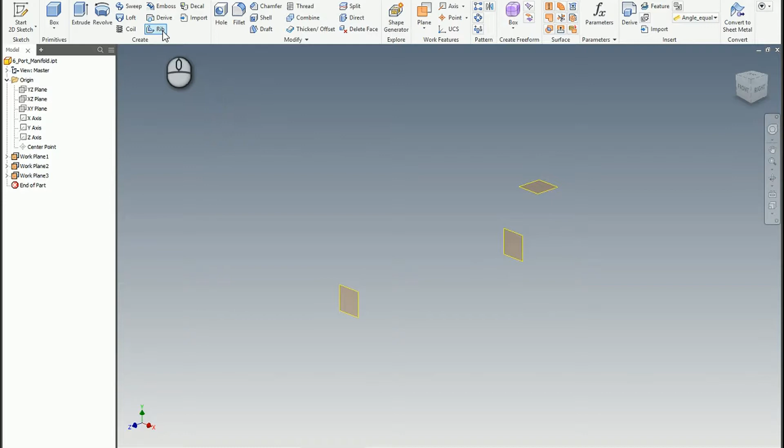So to bring in the external barbs, because I don't know the barb design and don't want to look it up, I can extract it really quickly from an existing design. I'm going to go ahead and derive in those solids that I modified. The 60 should be that 3/4 barb. I'm going to grab that one first and hit open, and it places it in position.

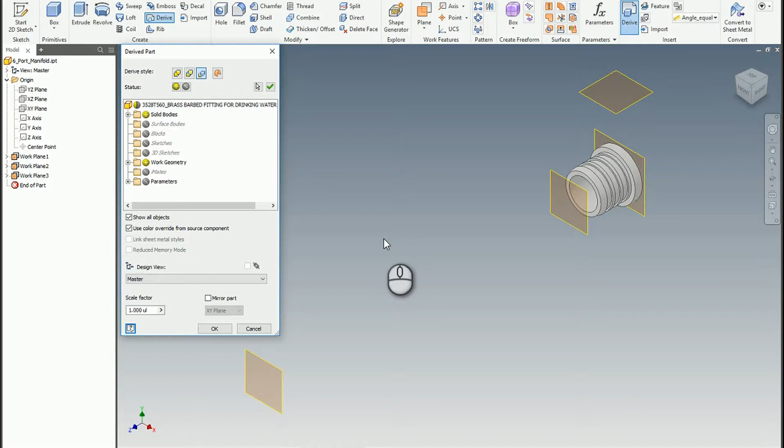Now, what the derive tool does is it allows me to grab geometry from outside my model and bring it into this model, then I can pick and choose which features come across. I can also change colors, change the scale, mirror it. In this case, I'm going to keep it really simple and just turn off the work geometry. I don't need it, I only require the barb solid. So then I hit OK, and now we've brought that barb in.

And the really powerful part of the derive tool is if this barb had to change for whatever reason, like I had to modify it, it would update in this part. So this is another great technique for using sort of a quote unquote live link to the original models. Something pretty powerful about that.

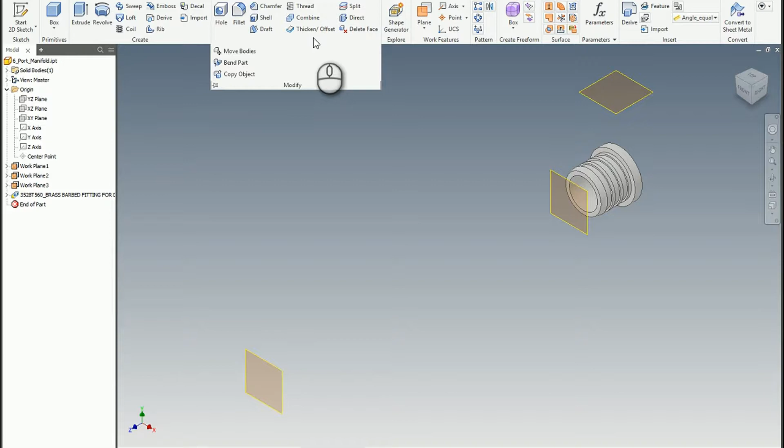Awesome. So what we'll do next then is we will grab the barb here, and let's position it at the end. We'll just move this one right away before we bring in the other one.

So I'm going to go ahead and grab the move bodies command. What this does is it allows me to take a solid body and reposition it. Regardless of where you originally sketched it, or in this case where I originally imported it, I can reposition it using this move bodies tool. So it's a pretty powerful tool. It's a little bit quirky, like every time you launch it, it wants to move it in the X 1 inch right away. That's a little strange, but it's still pretty solid.

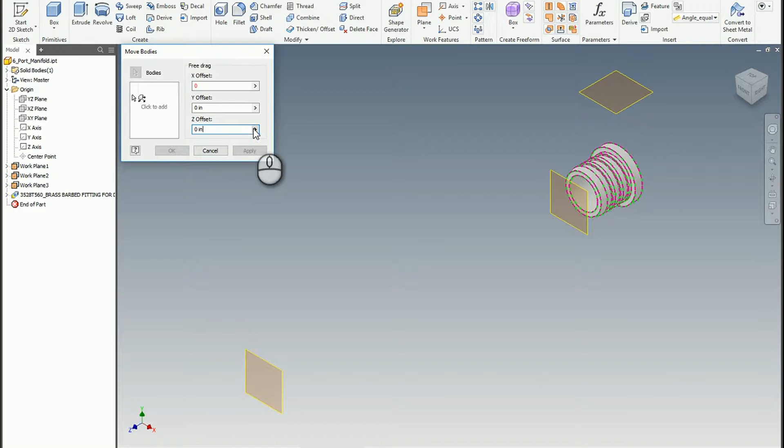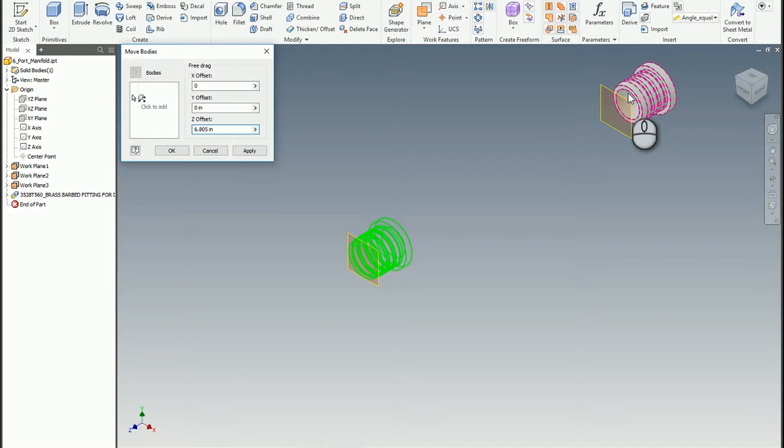And so that's it for this one. All we're going to do is stick the front of that all the way to the very end of the part. And now we've repositioned that 3/4 barb.

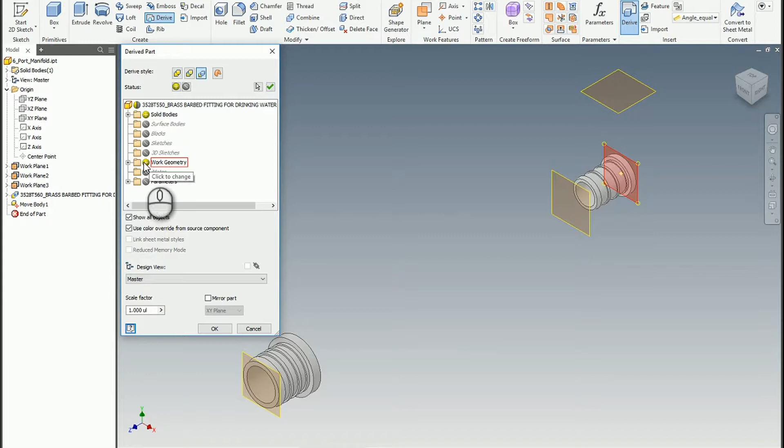Cool. So the next step in the process then is we need to apply the second barb. So if we come in here and derive in the 3/4 inch barb, we can do a lot of the same stuff. So I hit open. I don't believe I need any work geometry, so I'm just going to turn that off. And then I open it up, and there's our 3/4 barb.

We're going to have to reposition this as well, which is where we have these additional work planes to utilize. So let's launch the Move Bodies tool one more time. I'm going to grab the 3/4 inch barb this time, and I don't want to offset it in the X. Instead of translating, what we actually want to do is rotate it about a line.

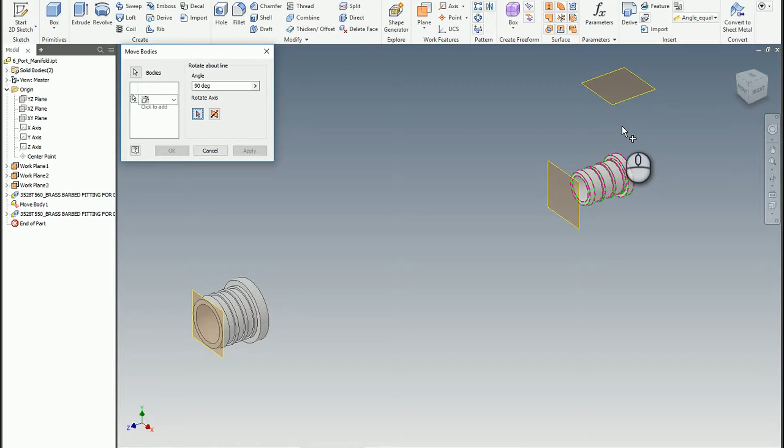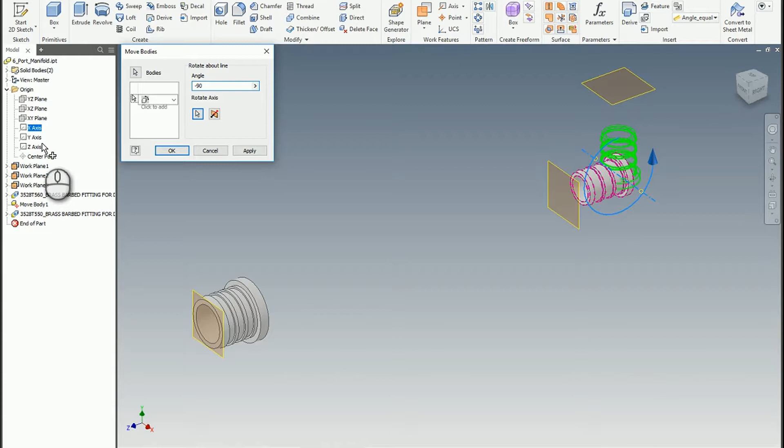If you remember from the McMaster-Carr website, that barb is actually facing directly up, opening to the positive Y in this case. So I want to rotate that about the X axis, which would flip it up or down to the right orientation. You can set this to -90, or say 270 — it doesn't really matter what you type in as long as you get the orientation correct. Then I'll go ahead and hit apply.

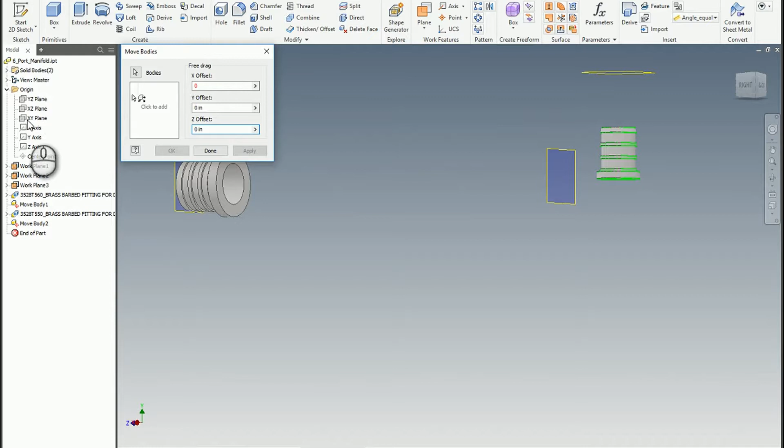Now I can do the rest of the motions to reposition this. I'm going to do a free rotate or translate again, not in the X, and then measure in the Z, this time from the XY plane. It's not visible, so let me turn that on here quick, just for our reference.

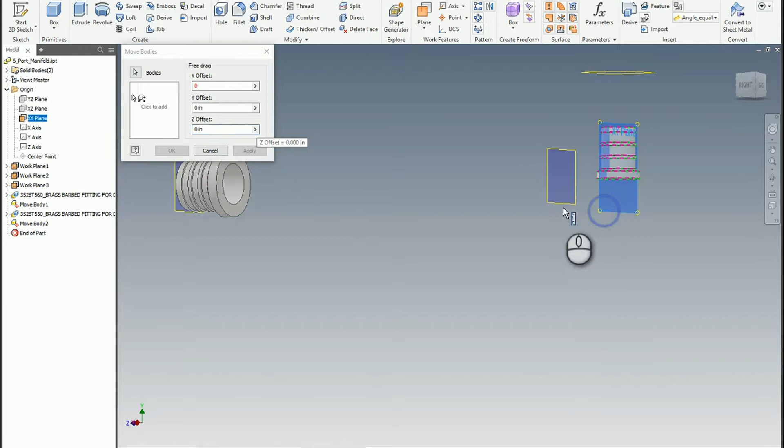Now we'll launch the Move Bodies command again. This body, I don't want to move it in the X — we'll move it along the Z instead. Select it, do the measure, and measure from plane to plane to move it in the Z. We like that, so hit apply. Select it again — still don't want to move it in the X. Now we're going to offset this in the Y direction, so I'll select, measure, and measure from the top to the very top of the part. Then go ahead and hit OK.

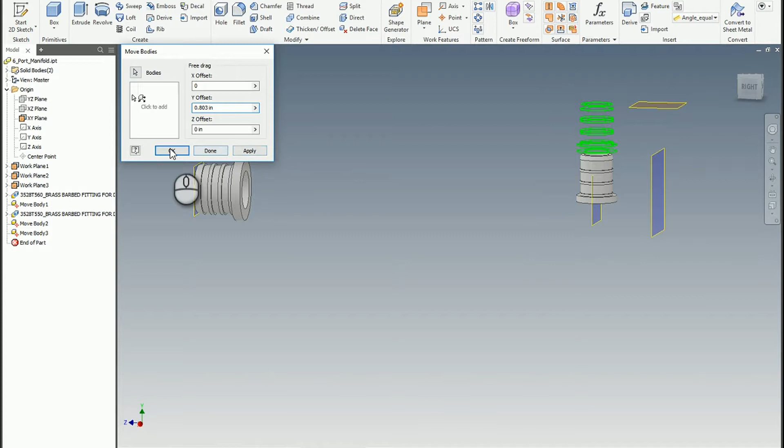So now we should have these components positioned exactly the way we need them to be. What I'm going to do is create the body of the part, and then we're going to add additional features to the component to kind of finish off the design.

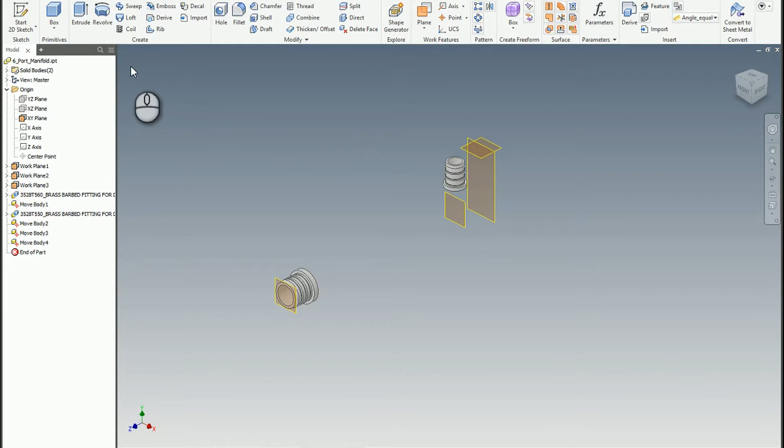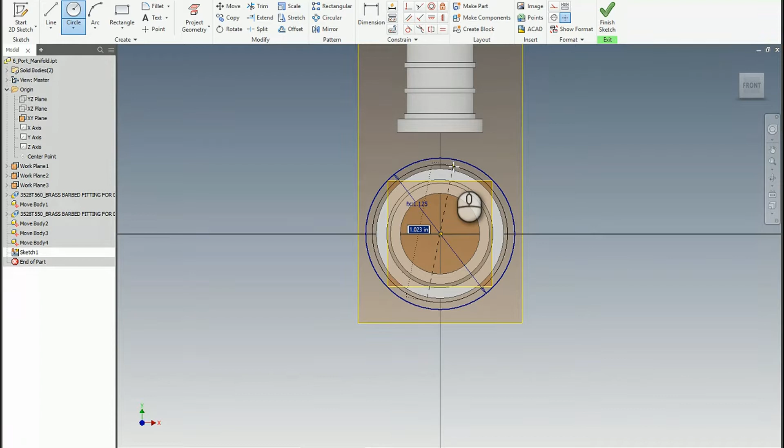I'll start a sketch on the XY plane. We have some of the characteristics of the model based on the spec page, so I named this OD, easy to type in and hit enter — that's the outer diameter of the tube. What I don't have is the thickness, so I'm going to make an assumption because I can go back and measure it later. I'll create a second circle, right click, add a general dimension, and say thickness equals 0.0625, or 1/16, and hit enter. That's good enough for what I'm trying to do — I feel pretty good about that.

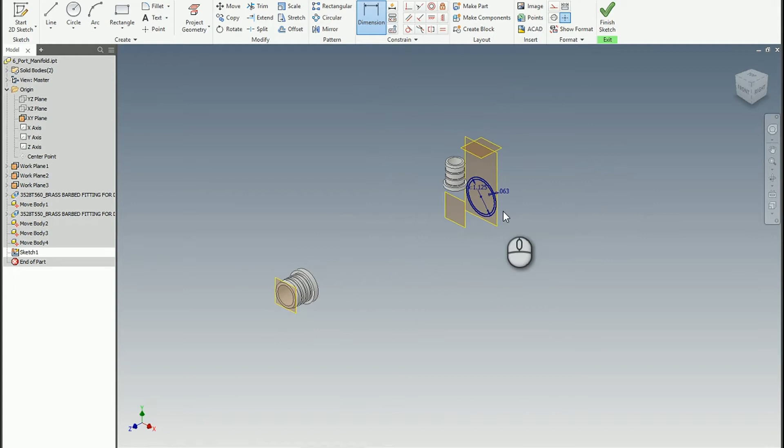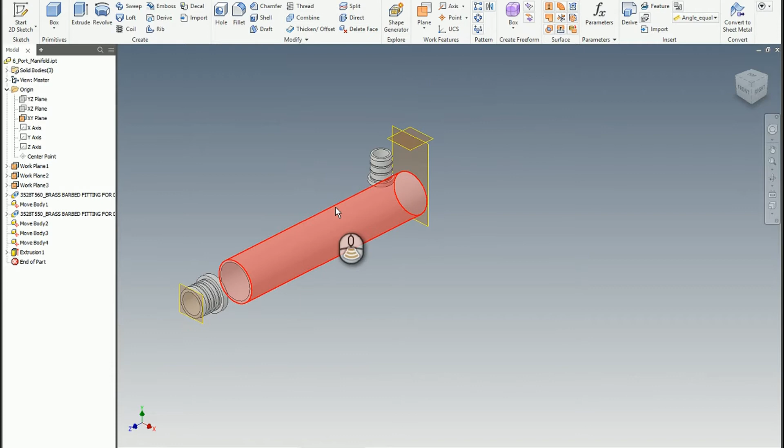Then I'll right click, finish my sketch, right click, extrude, and just extrude this tube as a new solid since we'll merge all these in the end. I want that to go the body length, but since we're only doing half of it, I'm going to divide by 2. Perfect — so now we've got this shape going on here.

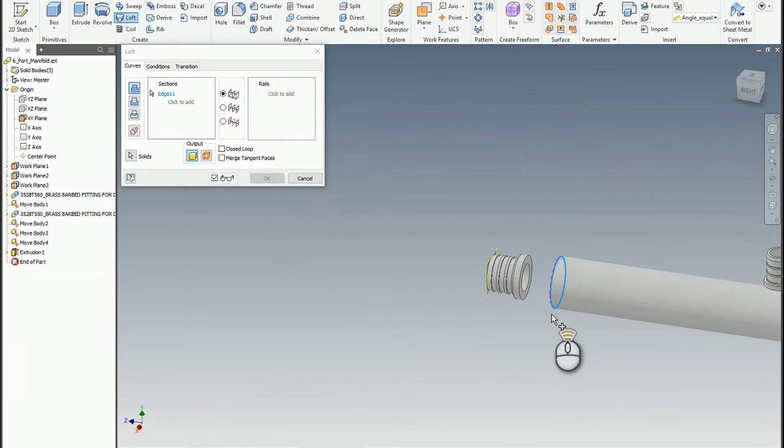Then we can add in a loft. If I loft these shapes together, if they're not all one solid, you may get errors. Let me show you — if I try to do a solid loft between two different solid bodies, it may or may not work. I've had it work occasionally, but also not work. In this case it worked, but we have a problem — it lofted a solid.

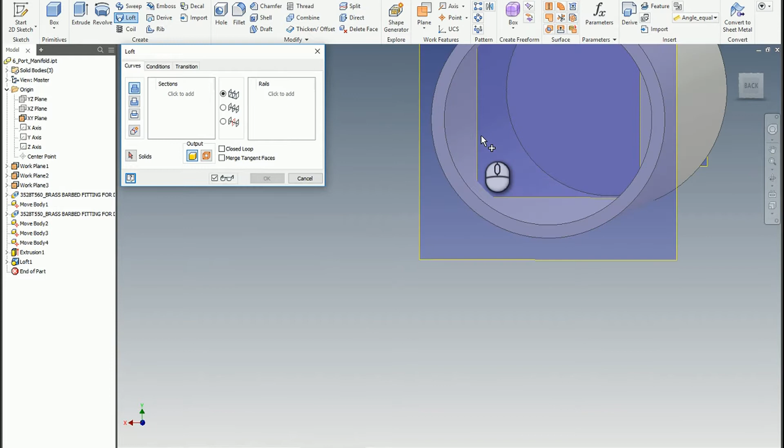So we'd have to add a second loft, which is not a big deal — I'll just loft it again. This time I'll loft from the interior edge to the interior edge at the front end of my tube, and I want to do a cut. If I hit apply or OK, now we've got that remedied.

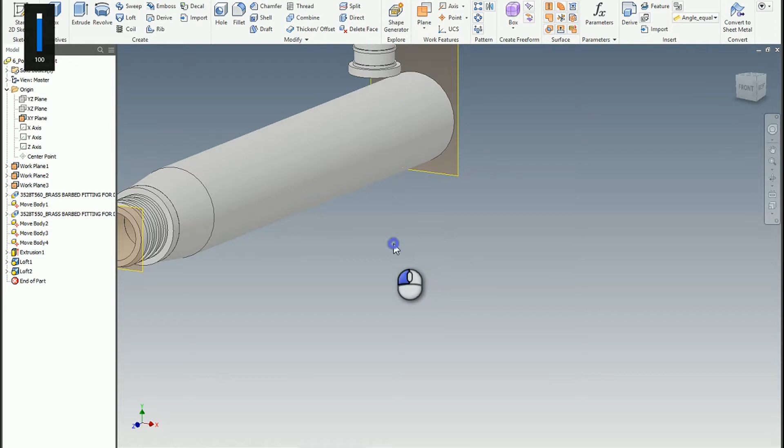We can see through our tube again. Sorry, cut off my volume there — anyway, just in case I missed that, if we look at the interior part of the tube now, we were able to remove that with the second loft.

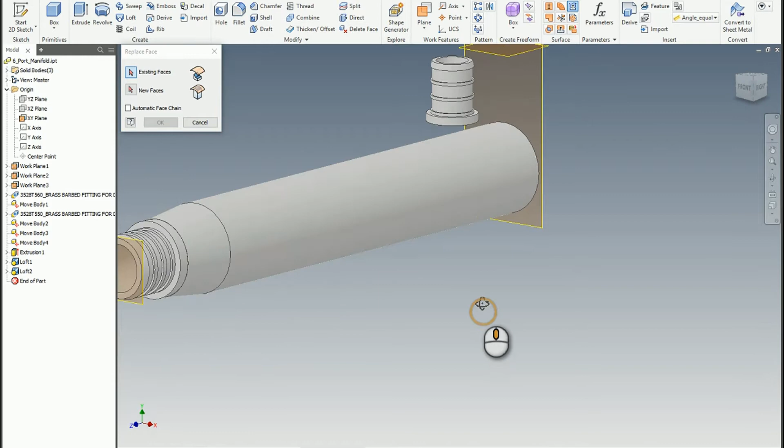Now we've got to attach this barb to the tube. Really easy to do — I'm going to use an interesting tool called Replace Face, found under the Surface panel. I click on Replace Face, grab the bottom of that initial barb, then click New Face, and make the outer cylindrical surface of the tube the new face. I hit OK, and now it does a straight-up replacement, which is kind of cool.

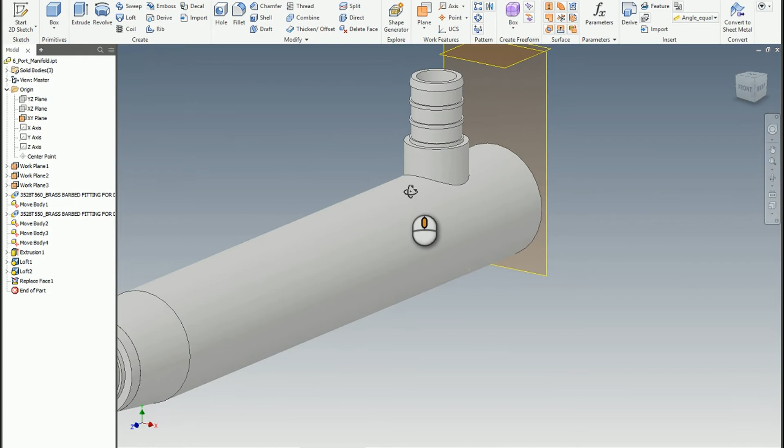Then we have to apply a couple of features here to finish it off. I'll select this top surface, create a new sketch, and plop in a circle here.

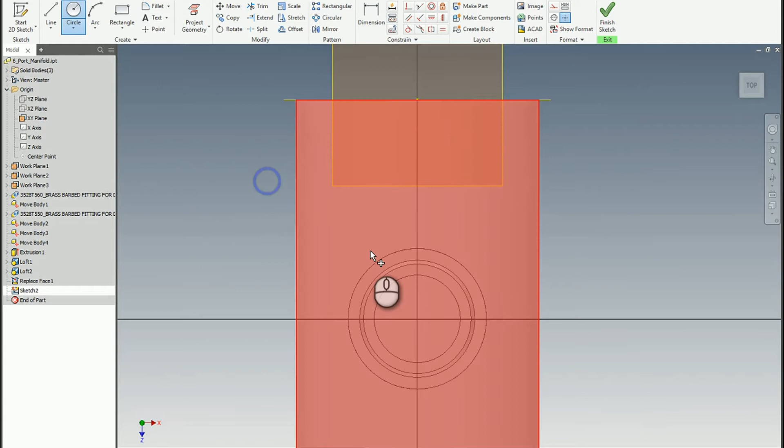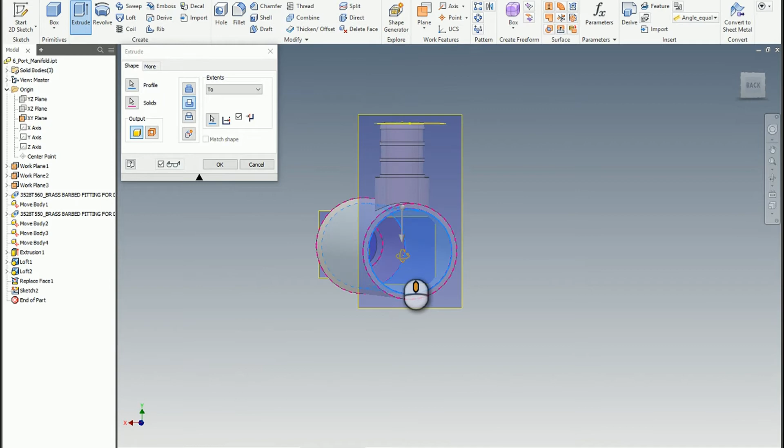Right click, project the geometry first. There we go, right click, finish. We don't even have to draw the circle. Then I can extrude that, choose the solid. I actually want to affect the tube. Then we're going to do a cut, pick To, and just select this interior surface, so we cut it all the way through to the interior surface for that hole. Click OK.

Then we actually have to mirror or pattern this out. It's a little bit quirky because this is a separate solid, so I have to pattern this out. Then I can come back and combine it, and then I can add the fillet. So we're going to do this in a couple of steps.

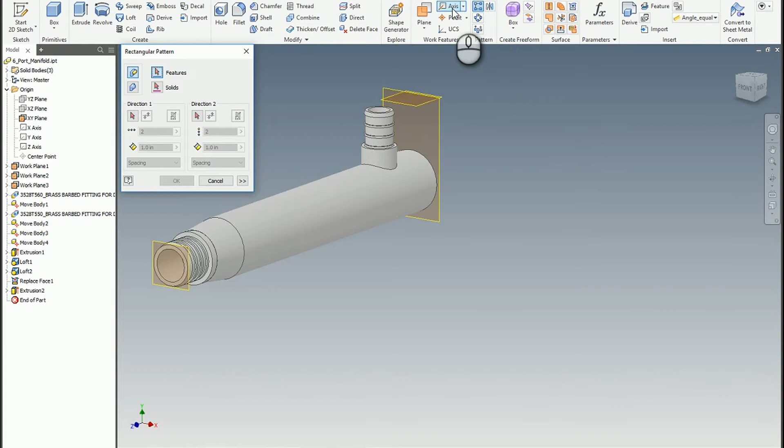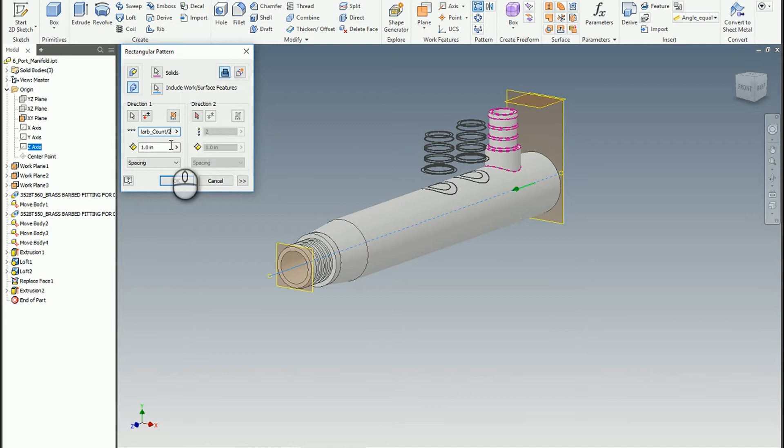I'm going to do a linear or rectangular pattern, grabbing a solid this time. I'll pattern this solid, and for direction 1 we're just going to go in the positive Z. Since we configured this ahead of time, we can go to the list parameters and use barb count. But we don't want all 6 on this side, so we'll say barb count divided by 2. For the spacing, we also use the barb spacing parameter we created. We hit OK, and now we've got our barbs.

So we actually had this as 3 different solids. To finish up the part, we're going to build it as 1. You grab this combine tool in the middle of the modify panel, and we're going to combine all of these into 1. We'll just do a straight join, click all 3 of them. The tool body and base really doesn't matter in this case, and I hit OK. So now we've gone from 3 solid bodies down to 1, and we can now apply that fillet.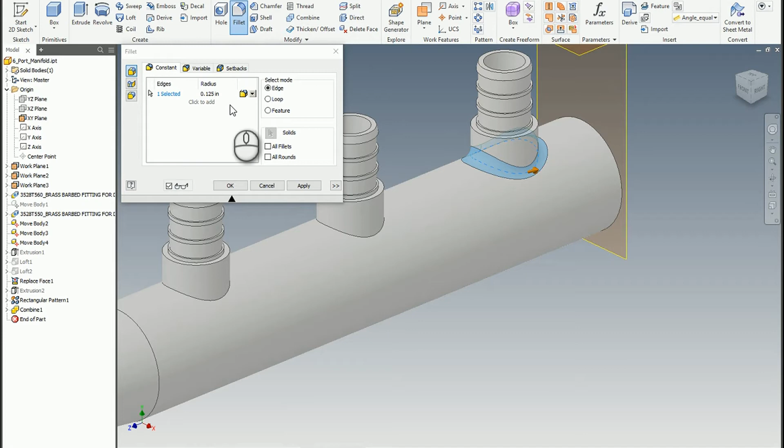I'll apply a fillet really quickly to this edge. I don't really care, let's say 1/8 is fine, we can always measure that if we needed to. We've got a hole, we've got the fillet, so I'm going to do one more pattern, this time a feature-based pattern, patterning the fillet and my cut. I'll choose the Z direction again, and the nice thing is once you've entered this data once, it usually remembers. So I can do barb count divided by 2, click the arrow again, it remembers barb spacing, and then I hit OK.

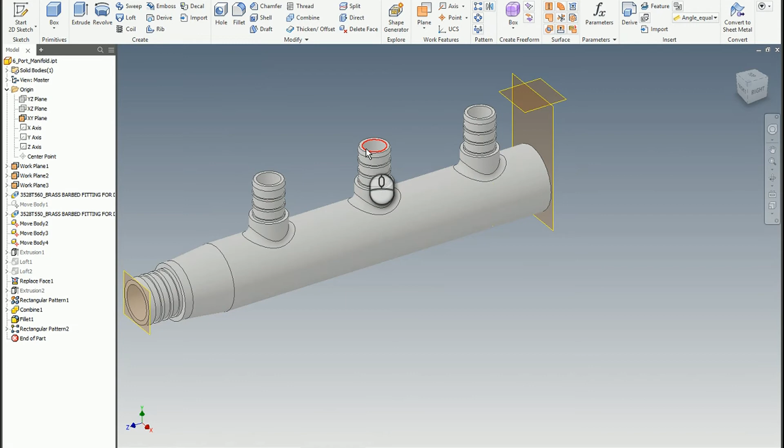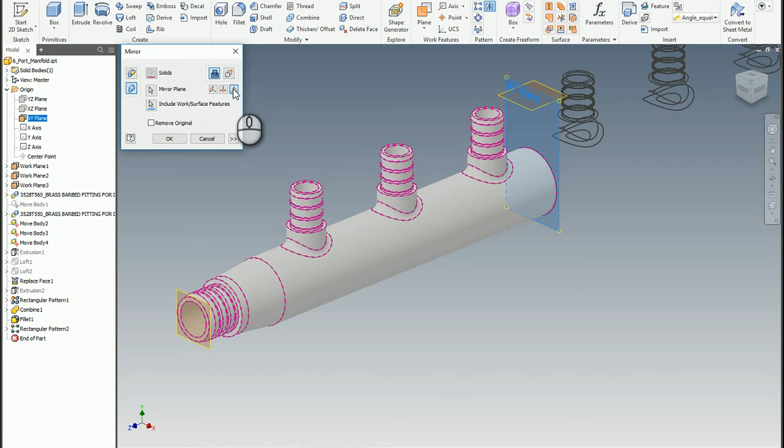So now we should be good to go. We've got a really nice part, half of it ready to rock. The last step in the process, we can use the mirror command. If I click on the mirror tool, I'm going to mirror the entire solid. One nice addition, I can't remember if this is in 2017 or 18, but they actually just show you the plane now, so I can say I want to mirror it about the XY plane. I don't even have to turn it on or hunt and peck for it, it just throws the origin planes right here. I do want to join it as the same solid, and I hit OK. And now there's our part.

So I'll just turn off some of these work features, just the visibility, and that is your 6-port manifold. So again, a little bit lengthy tutorial this time. I suppose I could have broken it up into 3 parts, but it just seemed so natural to do the whole part all as one.

Realize that you can extract solids from third-party parts. Either you download them - in this case I downloaded from McMaster Carr - and then using the tools within Inventor, I can build a part that maybe there isn't a model of, or you can't find it anyway wherever you go on the website. So I've built a couple of these now, and I've posted them on my GrabCAD page, so feel free to go check them out there, a 6-port and an 8-port. We'll see what I end up with. But again, this is just a simple way to work with geometry where I don't have the specs, but if I have a reliable source, I can extract the data I need to build the final part.